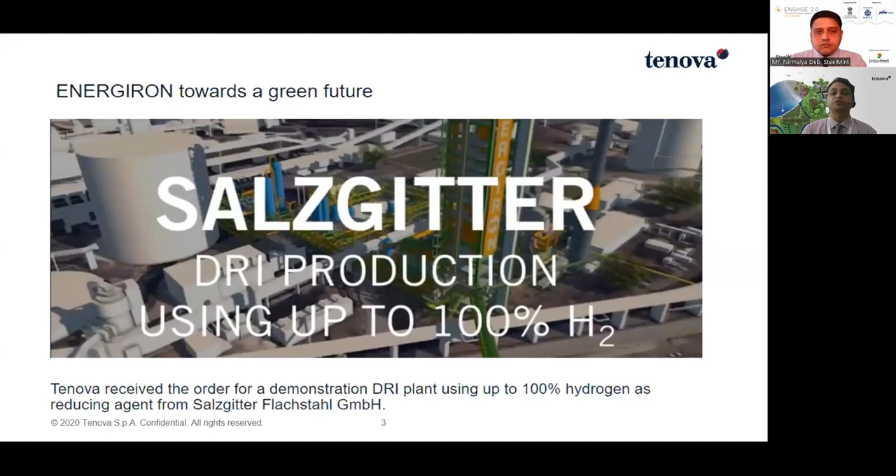Now, before China, we have already implemented such projects in Salzgitter. Salzgitter is in Germany, where we are already doing a project for them using 100% hydrogen. That is basically part of Salzgitter low CO2 steel making, in Germany. I'm going to explain more in the subsequent slides.

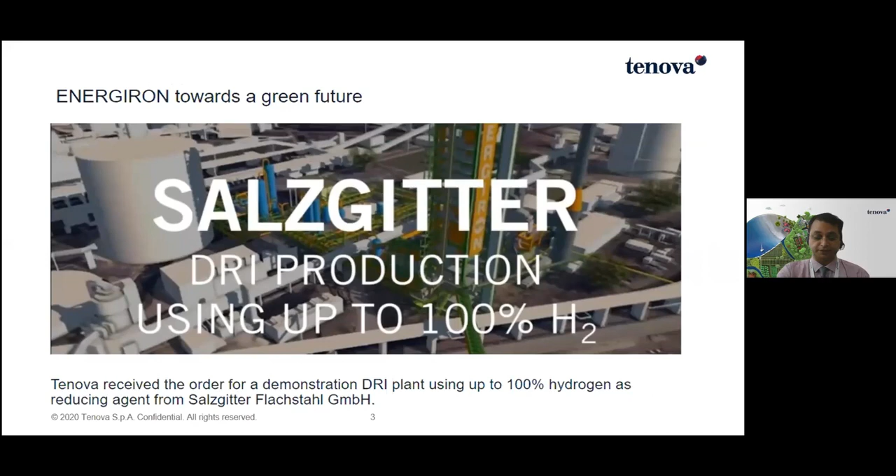Then HYBRIT. I think you might be hearing about HYBRIT in the recent news. This is in Sweden, done by SSAB. This is fossil-free steel, the world's first fossil-free steel making plant. And TENOVA, we are proud to be a partner of this mission. Now the plant is in operation in Sweden.

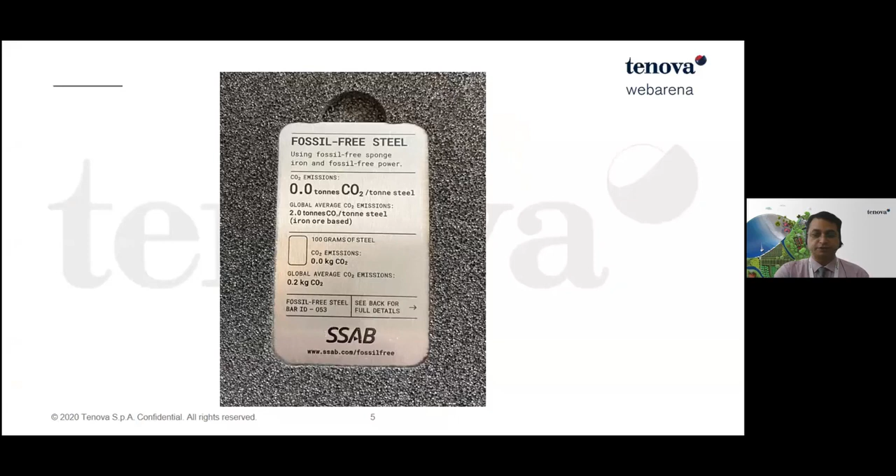You can see the fossil-free steel in actual. It is not in concept, not on paper, but in actual, it has been produced. SSAB fossil-free steel, where we have supplied our DRI plant.

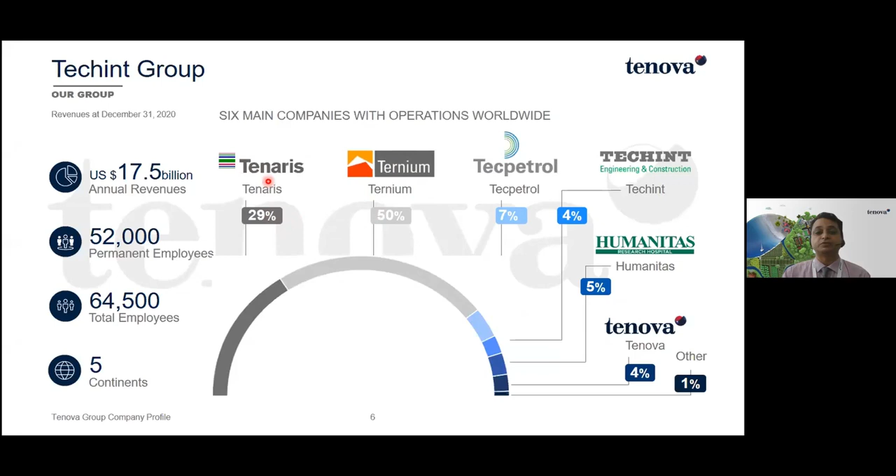So what we mean to say is that since we are part of the Techint group, which itself produces steel in a sustainable way, we know how sustainability plays a very important role for TENOVA individually.

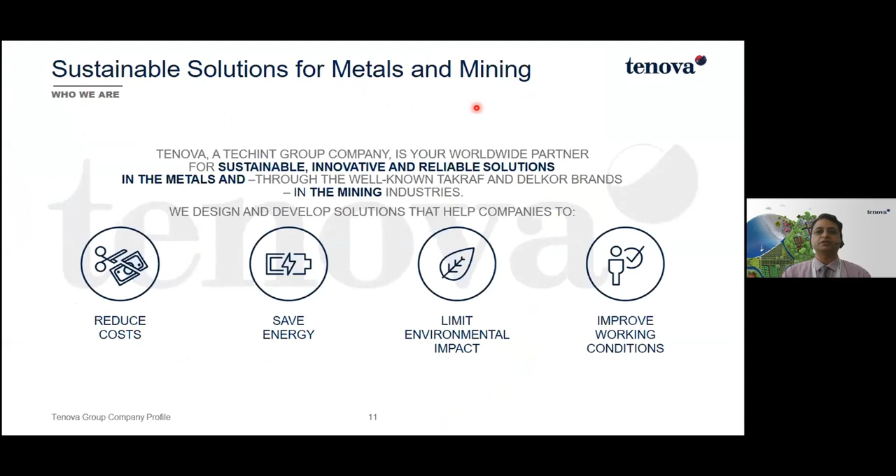So who is TENOVA? I'm taking one slide and then we'll jump to the main topic. We provide sustainable solutions for metals as well as mining. We focus on sustainability. And considering sustainability, we have come up with a new word, where you will find TENOVA appearing in that sustainability approach. So this is our mantra; that is why we developed a new word.

We have a worldwide presence, not only in India. Of course, in India in all the major cities, Mumbai, Chennai, Calcutta, Bengaluru, and in China also we are focused. So in this presentation, I'm going to focus on China and India because the topic is like that.

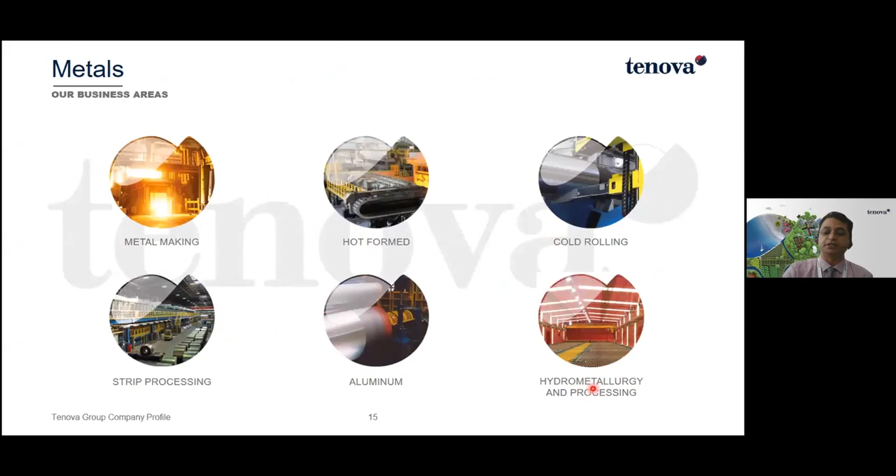So the main focus here will be our HYL technology, which is owned by us, and we will be discussing DRI making. As I told you, I belong to the metal division and upstream division. So we are into metal making, hot forming, cold rolling mill, strip processing, aluminum, and we are into hydro and pyrometallurgy also. Now, coming again to the topic, that is DRI.

Some basic concepts of DRI making I'm just going to touch upon, because in India there are a lot of coal-based DRI, there is the blast furnace route, and there are other routes also. So I'm just going to touch upon very basic chemistry, what we learned in elementary school: reduction with coal. Reduction means reduction of iron oxide. So this is a typical example of a blast furnace, which relies mostly on coal.

That is why you might be hearing that most countries are eliminating the blast furnace route and going ahead with either the scrap route or the DRI route. Why? The main reason is to reduce the footprint. You see, carbon is converted into carbon monoxide, and this carbon monoxide acts as a reducing agent, reducing the iron oxide from Fe2O3 or Fe3O4 to Fe and CO2. So at the end of the day, apart from iron, we are also generating CO2, 100% CO2, because we are using carbon monoxide as a reducing agent.

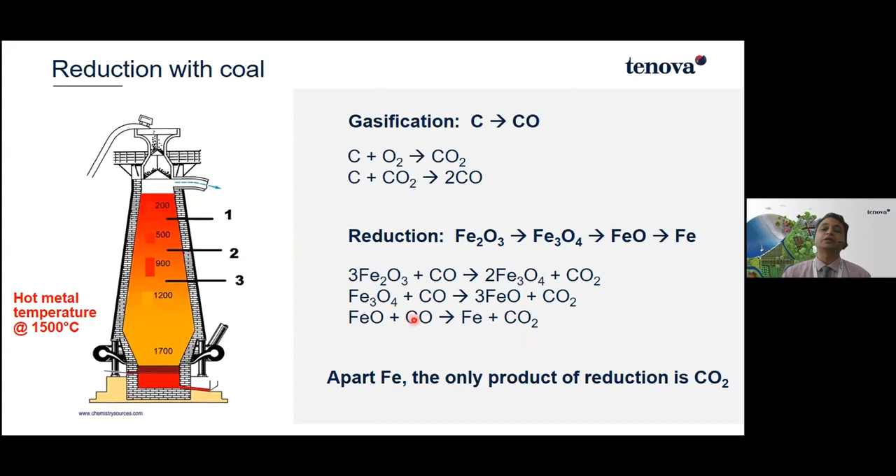Unlike that, in a typical DRI plant using natural gas, methane is broken down into carbon monoxide and hydrogen. Here hydrogen also comes into the picture for reduction; both carbon monoxide and hydrogen. In such a DRI plant, we put in the iron ore and get the DRI. Of course, there is no coal. They use the methane from natural gas to make these two reducing gases. And at the end of the day, apart from iron, after the reduction you find carbon dioxide and water.

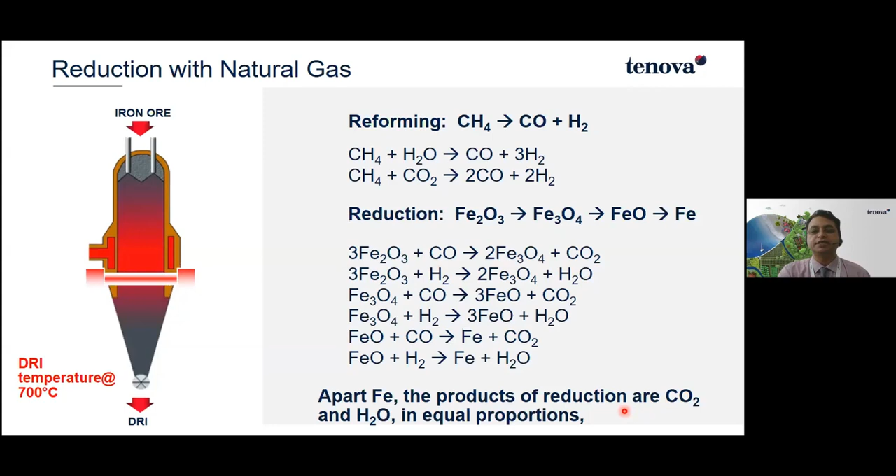So we can say there is a 50% reduction in CO2 as compared to the blast furnace. But our aim is not to stop at 50% carbon reduction. We should go for zero emission, and that is the main concept we are discussing in this forum. Now here hydrogen comes into the picture. I'm talking of green hydrogen, which can be obtained from electrolysis of water, and you can see we can produce oxygen as well as hydrogen.

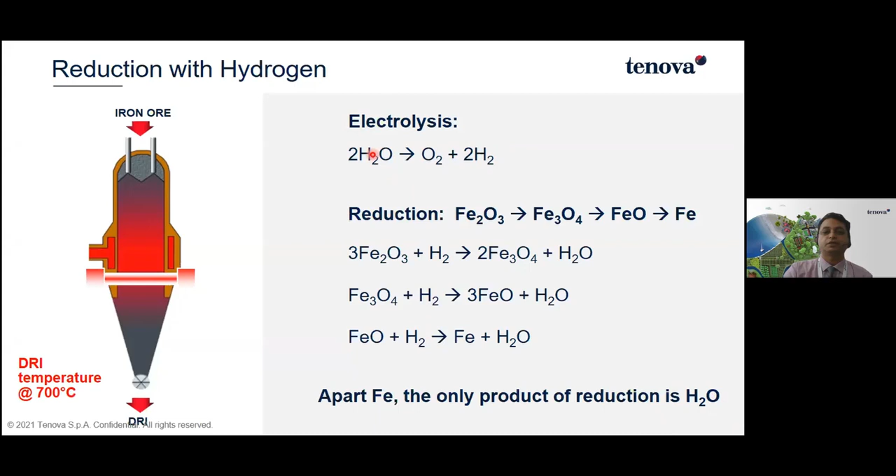And this hydrogen is used for the reduction of the iron oxide, and finally what we are getting is only water. So this should be our mission, the mission for zero carbon, which we can achieve with hydrogen if we produce it through electrolysis. So this is our DRI plant.

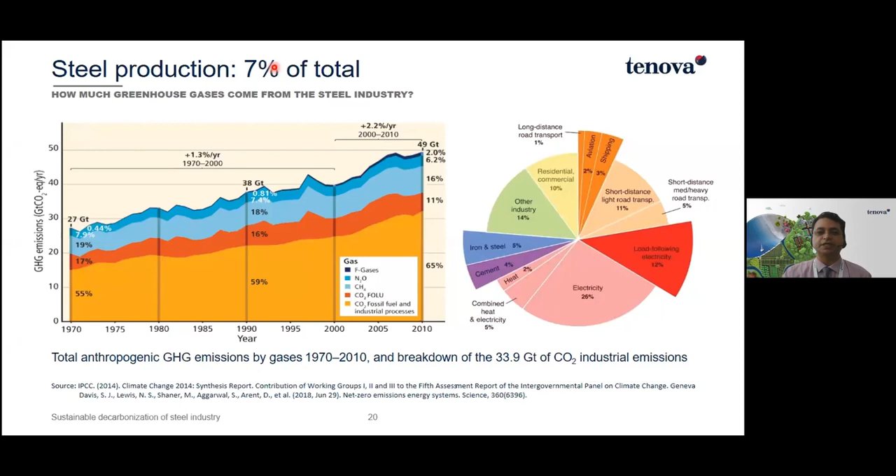Now, why are we talking about steel plants? Because it is a known fact that steel plants account for 7% of total greenhouse gas emissions. 7% is definitely not small, so we should focus on this. That is the main concept here.

Then there is DRI, which is based on natural gas or syngas or whatever gases are available. This is the DRI, so we are furthermore reducing CO2 by 50% at this stage. Rather than coke, it is substituted by natural gas or any other reducing gas which will reduce the iron oxide. Then finally, coming down, it is hydrogen.

Here, the aim is direct carbon avoidance. Rather than capturing and utilizing, why not focus on zero carbon effect? That is, avoid the carbon from the source itself. And that is how hydrogen comes into the picture. And by hydrogen, we are referring to green hydrogen.

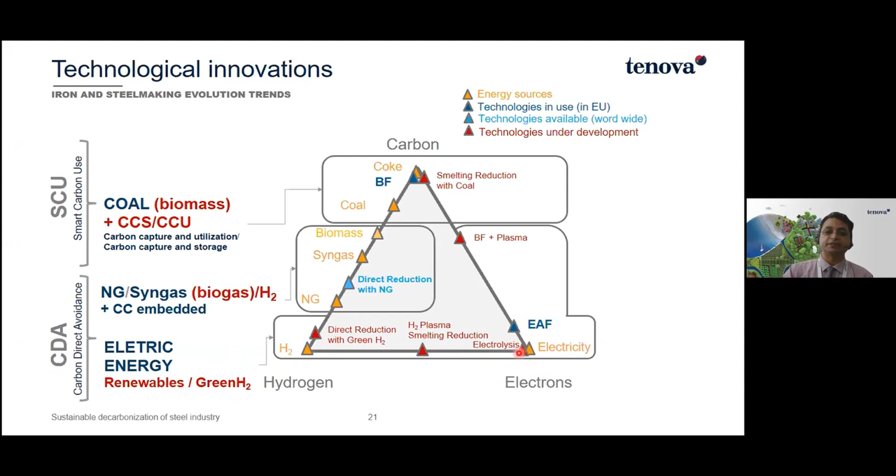What is meant by green hydrogen? It is hydrogen generated from renewable energy used to generate electricity, and that electricity goes into water to generate hydrogen. So that is the concept we are moving ahead with. Of course, there is also the electric arc furnace which uses electricity, and that electricity can also be generated from electrolysis. That is another topic which we can discuss.

In our DRI model, in the next slide I'll show you whether it is natural gas or hydrogen, it hardly makes any difference, because these two gases act as a reducing agent, as I have shown you in the previous chemical equations. The iron gets reduced, and that can be melted for steel making. So if hydrogen is available, we can substitute the natural gas.

And as for hydrogen, how it is getting generated, the main thrust should be renewable energy. That is more important, whether it is windmill or solar. So we generate the electricity, and in the electrolyzer, convert water into oxygen and hydrogen, and make green steel.

So the main theme here is that we should be ready with the flexibility of having whatever reducing gases are available, and our adaptability and preparedness for the future. That is more important, and China is already on this path.

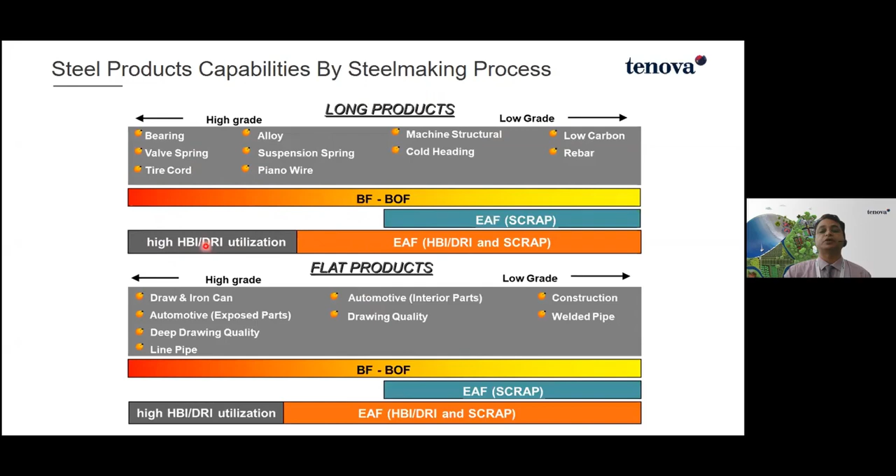Whether it's for long product or flat product, if one is installing DRI, it can cater to both long and flat product for low and high grade. So it can be a substitution to BF-BOF if you are opting for DRI, being a virgin source.

So this was a brief about the chemical scenario, economic scenario, market scenario, and how we can move ahead for DRI making based on hydrogen. Here you can see this is our HYL DRI technology, jointly developed by TENOVA and Danieli, and this is what we are going to brief you on in the next slide.

Here you may observe there is selective removal of CO2, because if you are using natural gas, definitely there will be CO2. As I mentioned, 50% will be CO2 and 50% water. So that 50% CO2 also we are not releasing into the atmosphere. Here the carbon capture unit and carbon capture storage, smart carbon storage units, come into the picture.

In our system, this is our DRI plant. I'll just explain. We put in the iron ore and finally we get either cold DRI, HBI, or hot DRI into the adjacent electric arc furnace. And nowadays the trend is to make pig iron.

This is a substitute to blast furnace, an alternate route of making hot metal. You put the DRI, and the DRI we get in our furnaces, in our DR module, in the HYL module, it is high carbon DRI. High carbon DRI means the carbon content goes from 1.5% up to 5%.

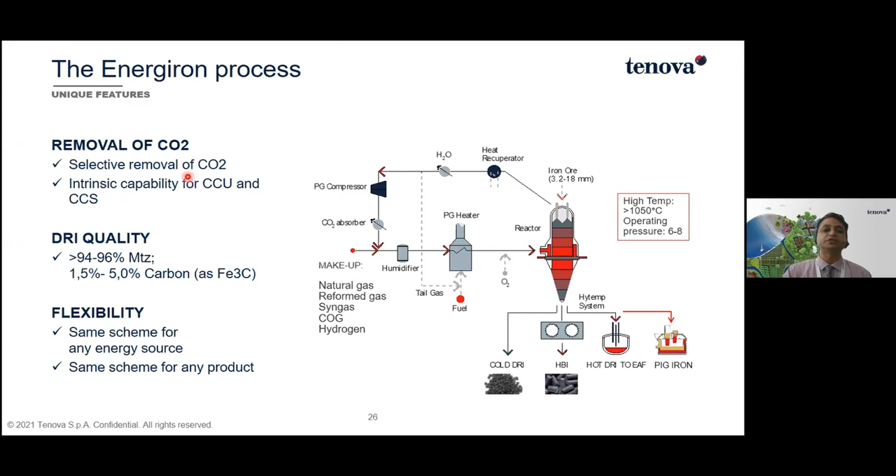Here, the CO2 removal system, as I was mentioning, inherently removes the CO2. This is very important, because if you are using hydrogen, there won't be any CO2 generation. But in case of methane, or coke oven gas, or other gases, there will be some CO2 generation. So what we do, through a selective removal system, is remove 60% of the CO2 that's generated in the system, and this CO2 gives added value as a byproduct.

It can be used for food and beverage industries, production of dry ice, or pumped into oil wells for boosting oil production, like the people at Emirates Steel are doing. Companies like Ternium and Tenaris sell it to Linde and other companies for food and beverage industries.

In Indonesia, they use it for food industries. At JSW Salav in India, the CO2 is sold to Air Liquide for making dry ice. Emirates Steel, as I mentioned, use it for enhanced oil recovery. So whatever CO2 is generated, we are not emitting it to the atmosphere—we are capturing it and utilizing it properly.

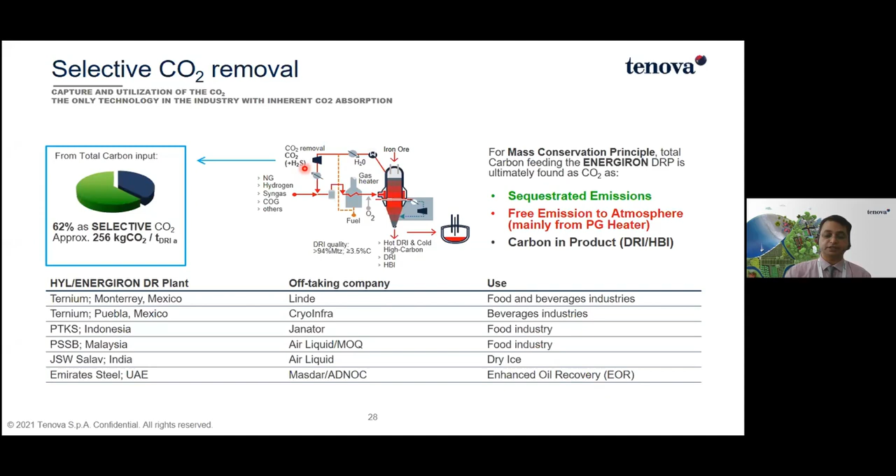Now, pig iron production via DRI plant, that's what I was mentioning before. The more important point here is that you can find the DRI plant clubbed with an open slag bath furnace. This is a reducing furnace beneath it.

What is the advantage of this? One feature is that we produce high carbon DRI on the top—in our system, we produce high carbon DRI of more than 4%. And there is a reducing arc furnace.

Basically it's a submerged arc furnace. It appears to look like a submerged arc furnace, but we work in a brush arc mode. Basically it does the reduction and helps melt the DRI from 600 degrees to 1400 degrees centigrade, whatever the blast furnace hot metal temperature is, and it can be poured directly into the torpedo ladle.

The other advantage is that we can maintain the BOF facility in the downstream—we just have to replace the blast furnace, no need to occupy more space. Everything happens in a vertical chamber.

A very important factor here is that we are not depending on DR grade pellets. BF grade pellets can be very easily utilized, so we are not requesting any DR grade pellet—only the BF grade, low cost pellet can be used. Why? Because the gangue that comes in can be removed in our open slag bath furnace, OSBF. And the slag we get can also be used, just like in a blast furnace, in the concrete industries.

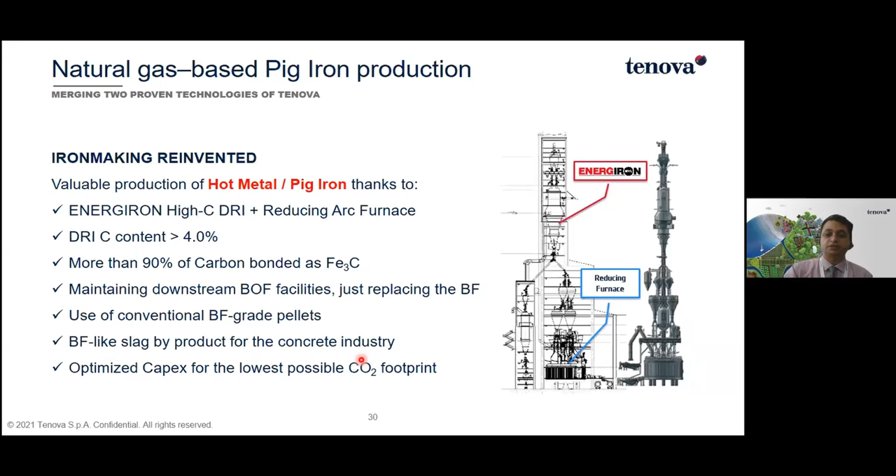Coming more into this concept, pig iron production via DRI.

Here you can see the real plant. The DRI is on the top and OSBF, open slag bath furnace, is in the bottom. There is provision for removing the slag, just like in a blast furnace, and we can also tap the hot metal into the torpedo ladle, which can be utilized in the existing downstream facility.

So there are various advantages of this type of furnace. You don't need such a big transformer as compared to the electric arc furnace, DRI and electric arc furnace route, wherein you need a high transformer, flicker, then SVC. Those things are not required. It looks like a submerged arc furnace having the Soderberg paste electrode. The refractory life also lasts up to 5 to 10 years. Unlike electric arc furnaces, the building is very small. There is no building as such.

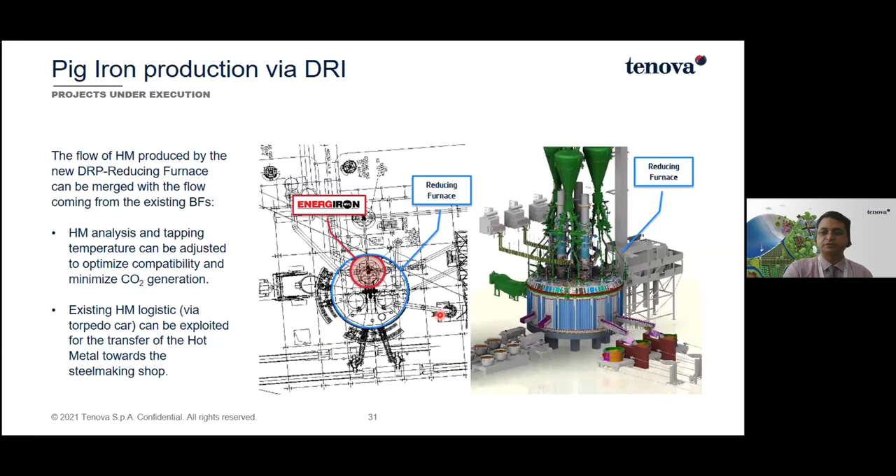It is installed just beneath the DRI plant. So yeah, this is one of the concepts already being implemented at various places.

Hydrogen-based DRI. Now we are coming back to the topic: carbon capture unit utilization, carbon capture utilization, or carbon capture storage, whatever it may be. Our aim should be carbon direct avoidance. Directly we have to avoid the carbon.

So you can see this is the DRI plant. As a reducing agent, what we are using is hydrogen, pure hydrogen. How is hydrogen generated? From electrolysis. And how do we get the electrical energy for electrolysis? That is from renewable energy. We are not using any thermal energy.

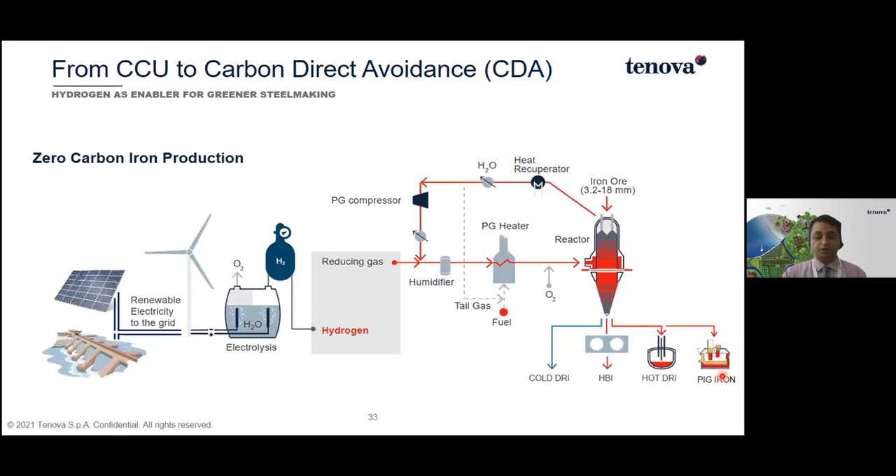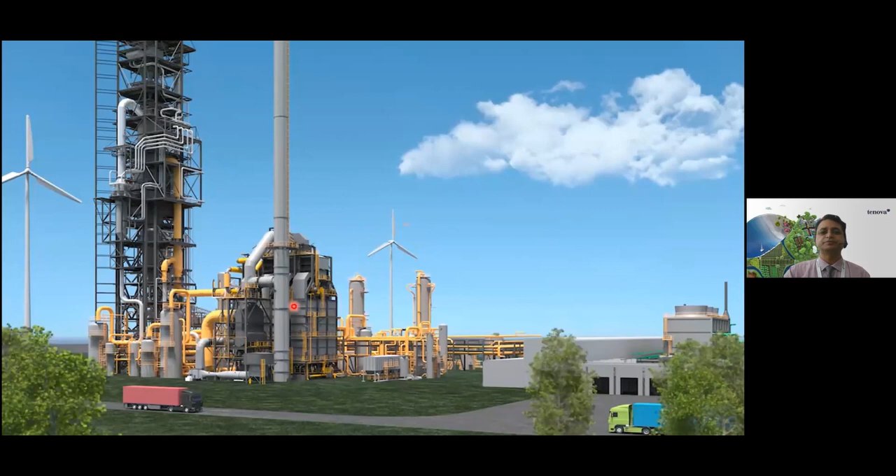This is the scheme we have explained to you, that we can make cold DRI, HBI, hot DRI, or pig iron. This should be our vision: a DRI plant clubbed with solar panels and windmills, generating electricity that can be used. So this is a total iron making facility. This is a process gas heater, and this is basically our DRI tower.

We did this in the 90s, some 30 years ago, with 90% hydrogen we trialed and tested it, and it was well proven, not an issue. That is why what we are thinking of now with hydrogen, we already did long ago as a pilot test, and it was quite successful. That is why we are available in the market for this type of hydrogen-based DRI.

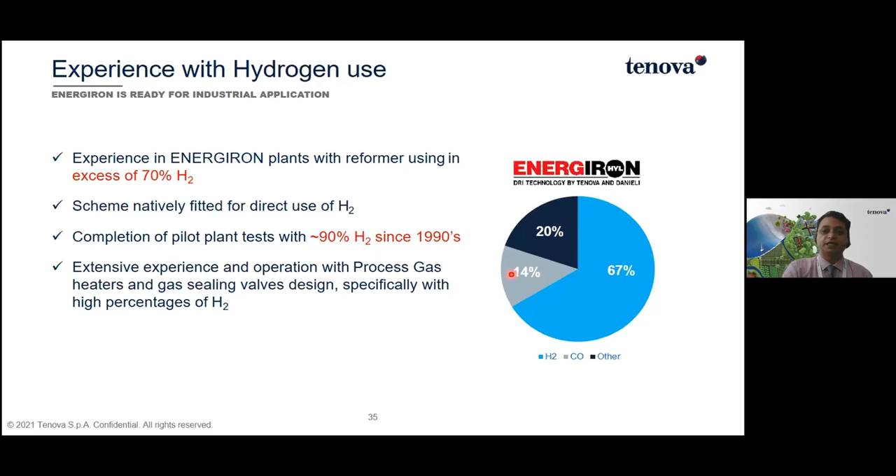I'll explain the advantage of hydrogen as compared to carbon monoxide. Of course, carbon monoxide generates CO2, but hydrogen doesn't generate any CO2.

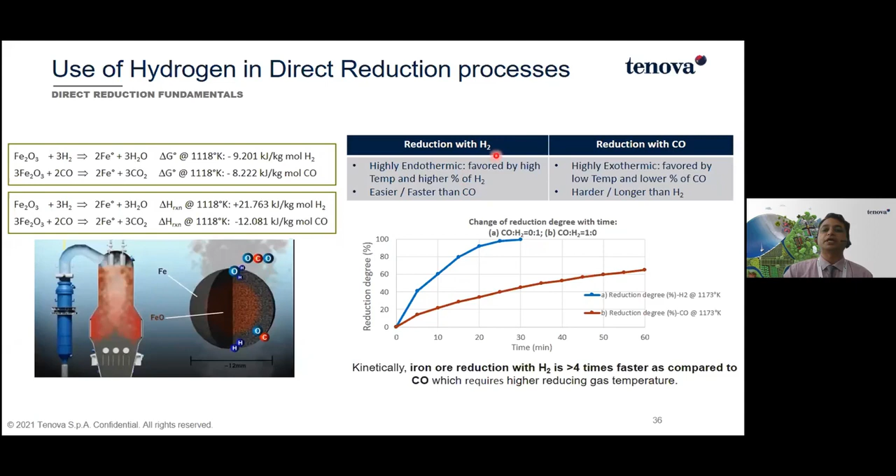From an energy balance point of view, there are two reducing agents for these gases: either hydrogen or carbon monoxide. With hydrogen, apart from not generating CO2, the other advantage is the reaction is very fast. If hydrogen reduces iron oxide, it is 4 times faster compared to carbon monoxide. That is why we are able to utilize more hydrogen as a reducing agent, because our purpose is to reduce the iron oxide, and that is what we are doing.

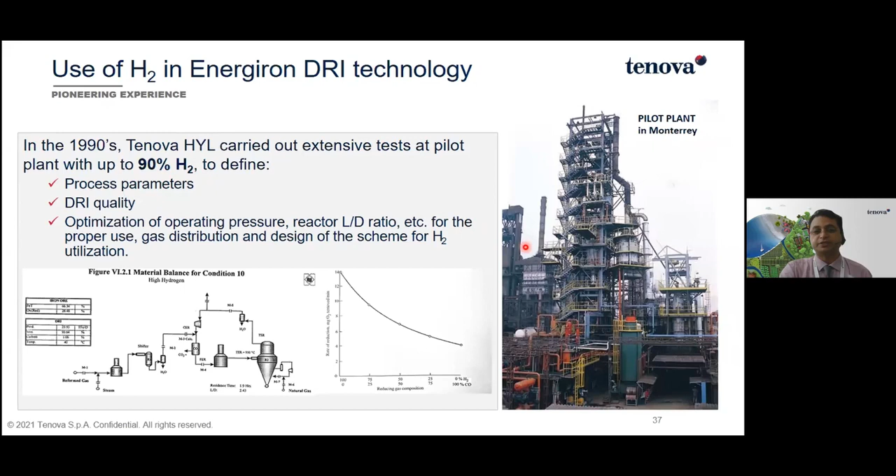It is more efficient because we are working at high pressure as compared to other technologies available in the market for gas-based DRI. In our system, the reactor itself is pressurized, 8 bar, as compared to other technologies in the market at 1.5 bar. With high pressure you also get high temperature. The equipment required is much less, and more importantly, we are able to use very little electrical energy compared to systems available in the market that work at low pressure.

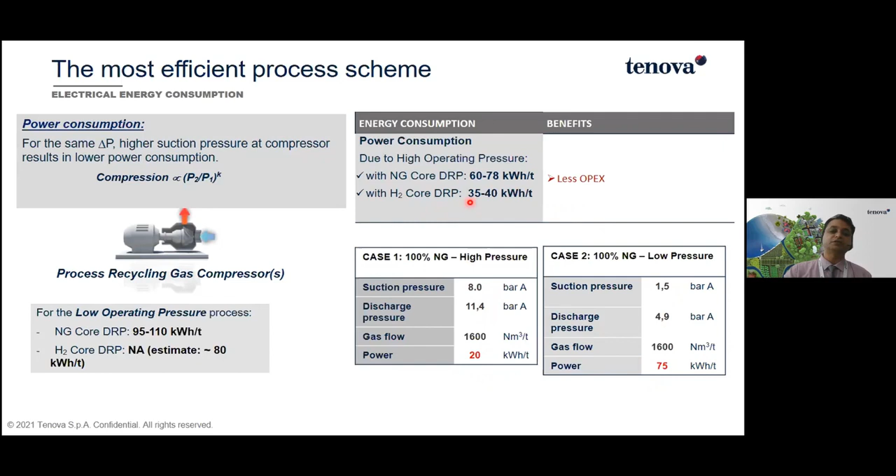So that is why OPEX is also very, very less as compared to. Even furthermore, if we are using hydrogen in the same proportion, it is much better as compared to the natural gas in energy consumption. So in this slide, this is what we are showing: the energy benefit in terms of switching from natural gas to hydrogen.

Because in China or wherever we are installing this plant, those plants are equipped to use either 100% natural gas, any proportion, 35%, 55%, and gradually up to 100% hydrogen, and vice versa, hydrogen to natural gas and natural gas to hydrogen, or any combination of gases. But if you are using more hydrogen, then energy consumption will be very less. So this is what we are trying to show here.

And coming to the CO2 emission, definitely there is a benefit if we switch from natural gas to hydrogen, and if that hydrogen is green hydrogen, then it is called zero carbon emission.

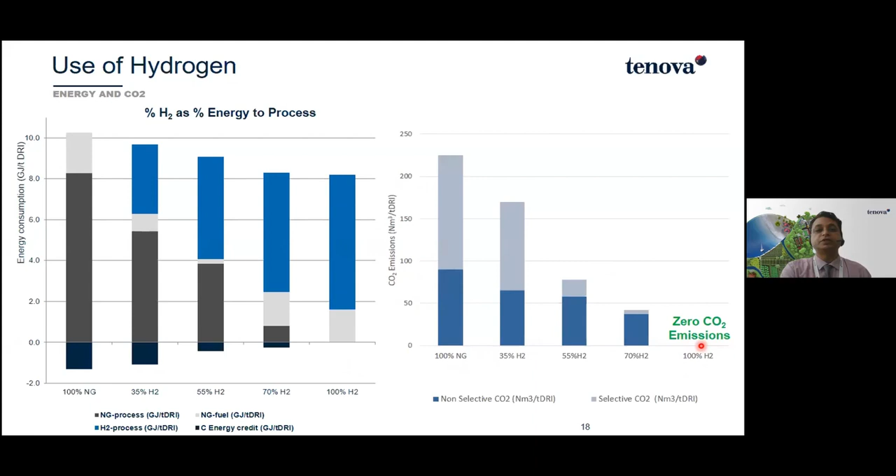Yes, for making 1 ton of DRI, we need approximately, for the reduction purpose, around 50 to 55 kg of hydrogen. That is equivalent to about 600 Nm³ of hydrogen. And another question may come up: for generating 1 kg of hydrogen, how much electrical energy is needed at the electrolyzer at the moment? That comes out to roughly 40 kilowatt hours. So you can see it is not less. We need huge electrical energy for hydrogen generation.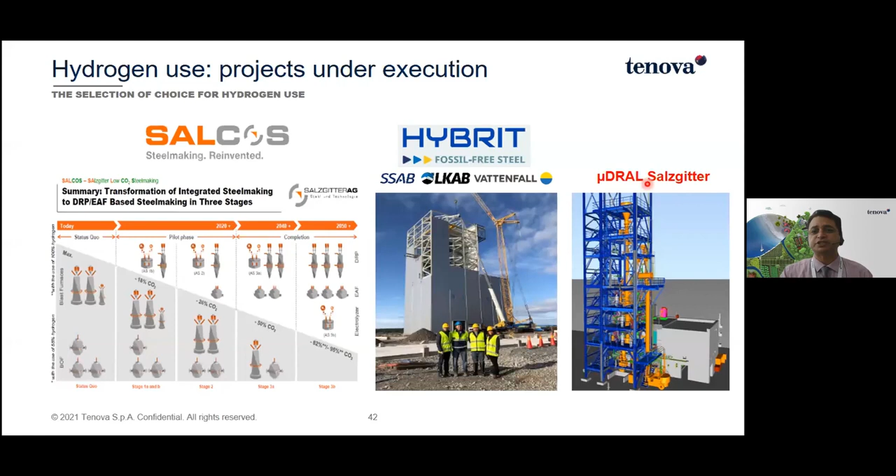This is µDRAL. Again, this plant is based on 100% hydrogen. This is also in execution phase and will be completed within the mid of this year. I think this summer we will be able to get the result out of it. This is in Salzgitter, the same. This is a demonstration plant for SALCOS.

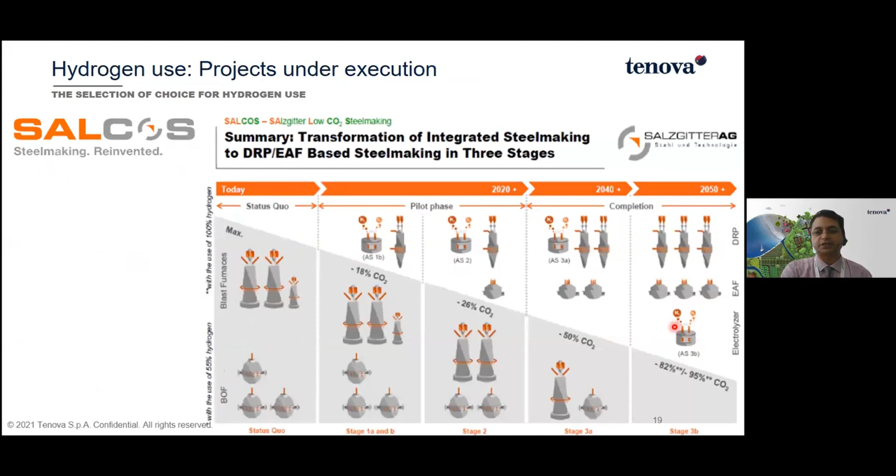Yeah, this SALCOS which I was mentioning, this is the same elaboration I did, that in a gradual way they are switching from blast furnace BOF to DRI EAF. Of course, you will find the electrolyzer here. Once it gets implemented, they will switch over to 100% hydrogen. So the SALCOS approach, I'm just mentioning further slides on this. Conventional coal-based BF route. Why am I referring to SALCOS?

Because the same philosophy is now being adopted by China, these two plants which I was mentioning. Conventional coal-based BF route, because in China also, right now, these two steel makers which I have shown are making steel mainly through the BF route, and it accounts for 1.6 ton CO2 generated per ton of liquid steel. Of course, for the Indian case, it is, I think, more. It is something around 2.2 ton.

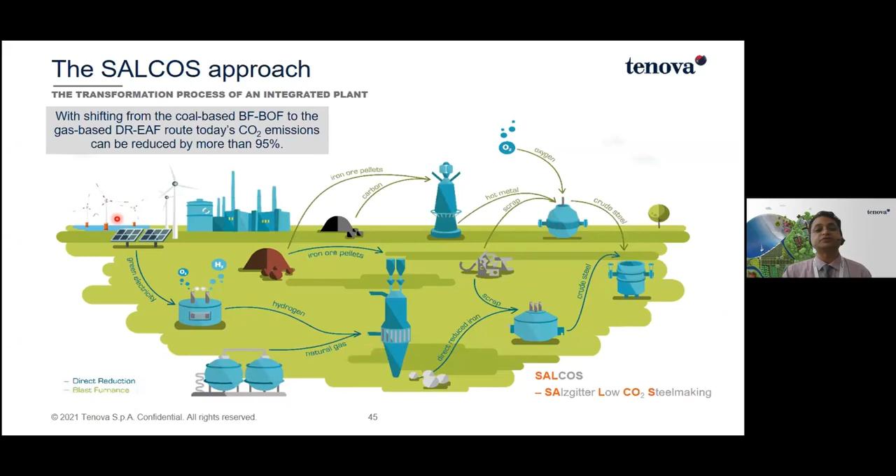The shifting and transformation process will be from BF to the gas-based DRI route, to reduce the emission by more than 95%. How? You see the dark blue line, that is direct reduction. You install the DRI plant, install the electric arc furnace, and make the steel out of it. Downstream facilities will remain the same. And this can utilize natural gas, as I mentioned, or it can also use hydrogen in any proportion. The hydrogen is generated from green electricity. So this is the approach of SALCOS.

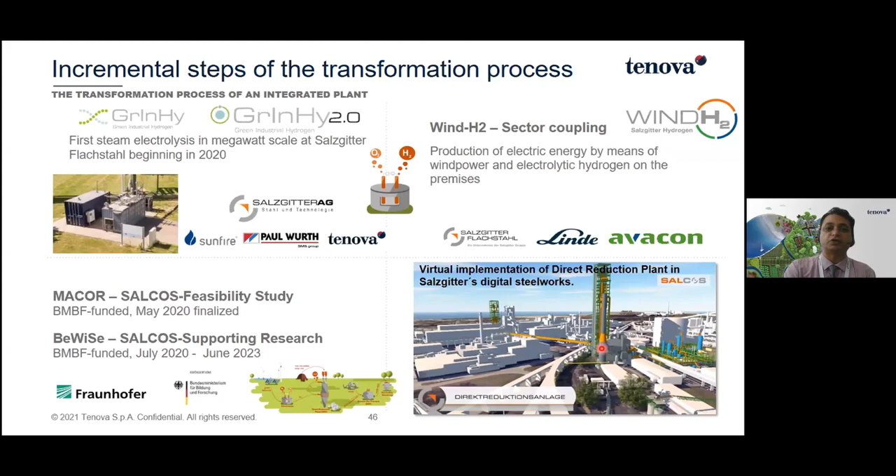So in SALCOS, there are a lot of agencies involved. Our part is to make the DRI plant. And there are other agencies involved for the electrolyzer and wind and solar energy, how to convert it into electricity, and that electricity into the electrolyzer. So there are various agencies involved in the SALCOS project. Yeah, I was mentioning the same SALCOS.

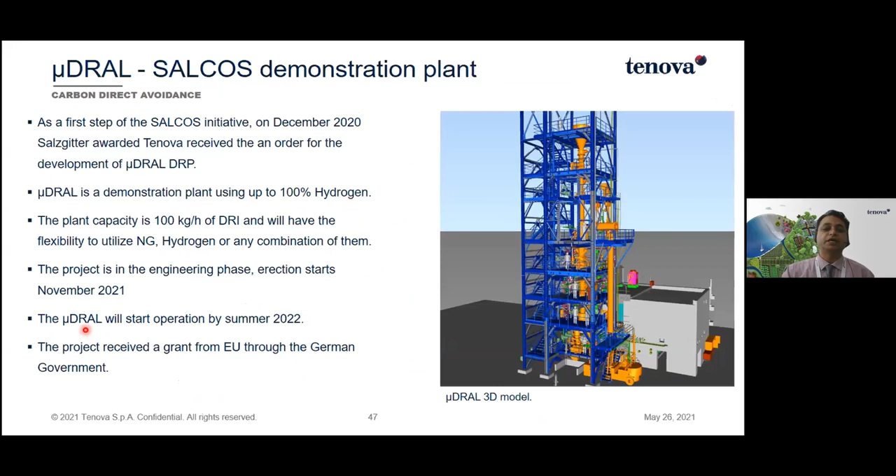They are also doing a project in parallel for the µDRAL, the demonstration plant which I was mentioning, that will use 100% hydrogen, already in execution phase, and we hope this will start in the summer of this year itself. So in a nutshell, back to SALCOS, here there is a DRI plant with the best available technology, equipped to run with natural gas and/or green hydrogen, and so this is basically a part of carbon direct avoidance.

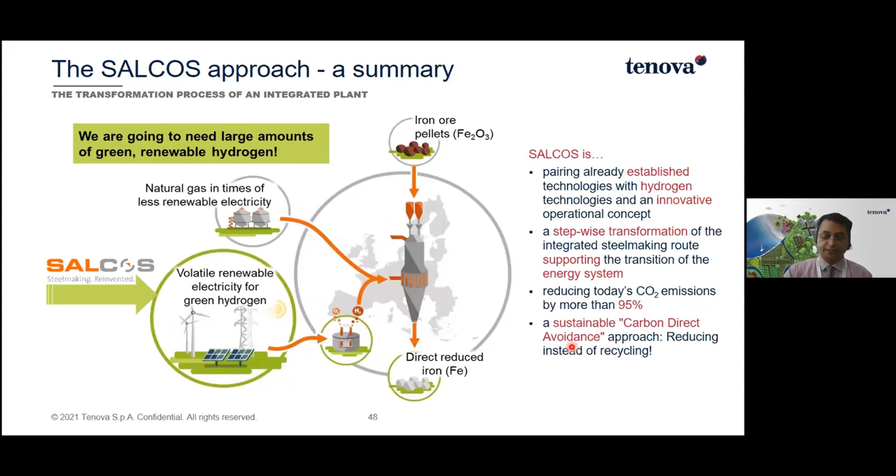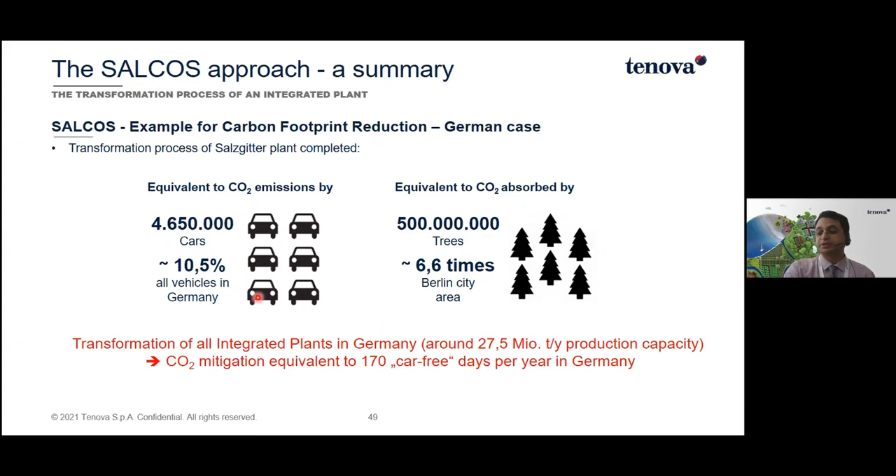Yeah, this is the HYBRIT project. As I mentioned, you might have seen it in the recent news. The aim is to replace coking coal with hydrogen, and the main effort is to reduce CO2 and decarbonize the steel industry. This is the project in Sweden, already commissioned, already in production. You might have seen the small sample which I showed you in the previous slide. Inside there is a DRI plant, and we are supplying our DRI plant. So there is no carbon footprint. The plant is now in operation.

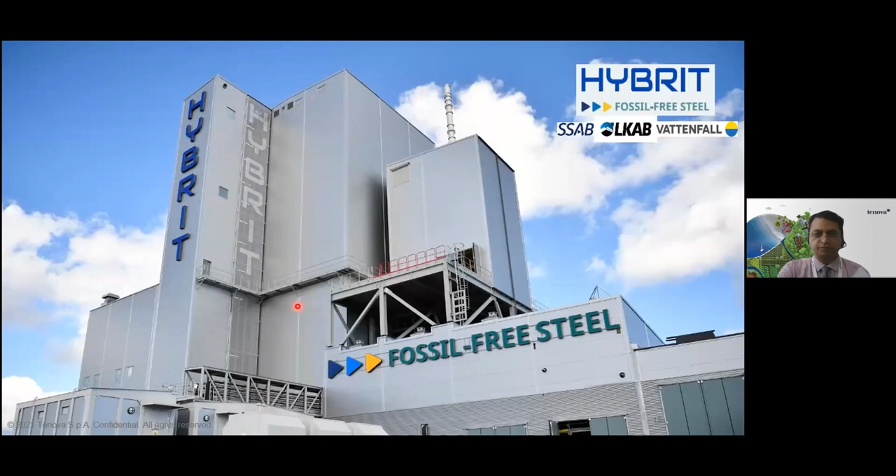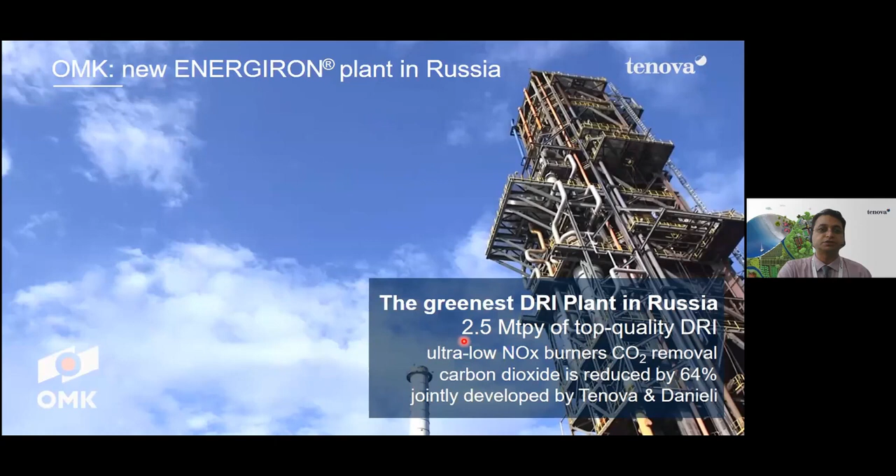So this is one of the plants in Russia. This is the greenest DRI plant in Russia, now in implementation. This is a big plant, 2.5 million ton. And it is already fitted with a CO2 removal system, which will reduce the carbon footprint by 64%. It is already in execution phase. Of course, from Russia, I think we should quickly jump back to China, because Russia is already in the news. So anyway, coming back to China.

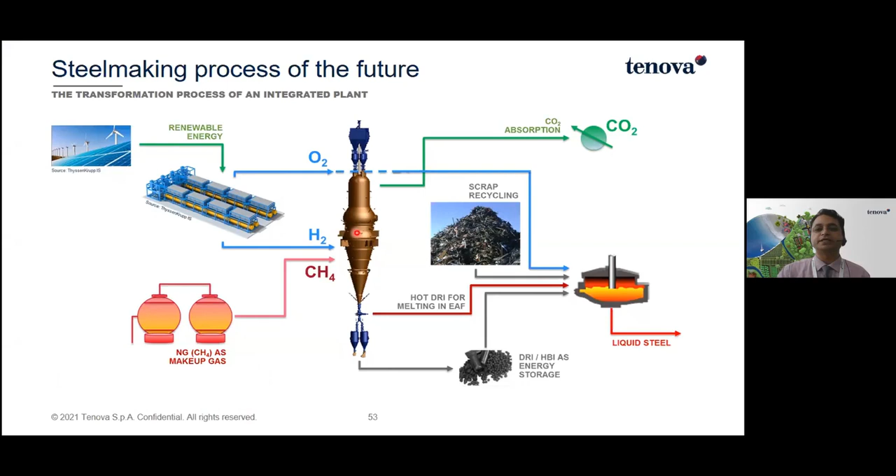Coming back to the hot metal, just to give you the basic idea of how we are talking about replacing the blast furnace with the DRI. This is a DRI.

We are making the high carbon DRI. That is, if you are using natural gas, 4 to 5% of carbon. Then this high carbon DRI at 650 degrees will be melted in our OSBF. Either you can put it in an electric arc furnace, or you can use it in the OSBF.

The advantage of OSBF is that it will remove the slag, all the silica and gangue, whatever is coming in the iron ore, that is the BF grade pellet or even the low grade pellet, we can use it. So we are not bothered about how much gangue is there, because we are doing the adjustment here. We are also doing the adjustment of the carbon here. Of course, when it is 4 to 5% carbon, then we are very happy.

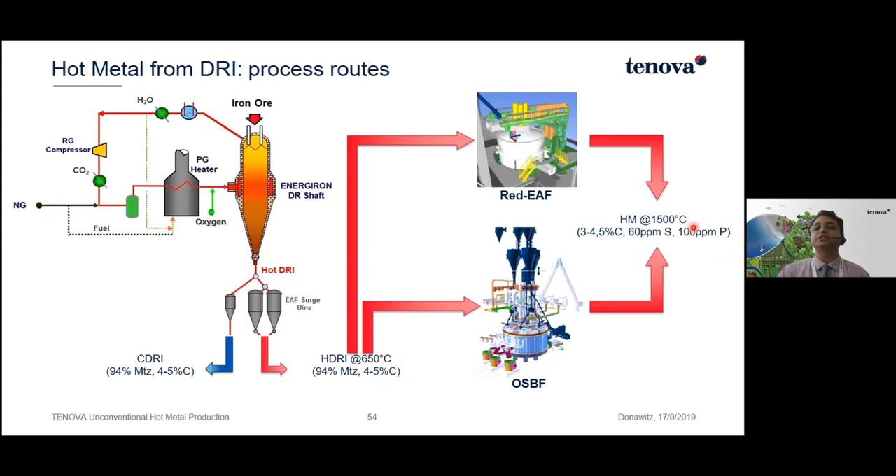But if we are replacing this natural gas with hydrogen, then there won't be any carbon in the DRI. We can add the carbon to the DRI in OSBF to maintain the same consistency of the hot metal which we are getting. And downstream you can use the BOF or LD shop, which is already prevailing.

For example, just to give you more idea on this, reducing the carbon footprint. Normally pellets, of course, are required. The existing practice nowadays is that whatever pellets are there, we put in the blast furnace, and then it goes into the BOF. But with DRI and OSBF, use the same pellet, the BF grade pellet. We are not asking for the DR grade pellet, the costly pellet.

Use it in the DRI plant, melt it in our OSBF, make the same chemistry of 4.5% plus minus, whatever you are getting from the hot metal, pour it in the same torpedo ladle, and use the same downstream facility for making the steel. In this process, you are reducing 50% CO2 emission if we are switching over from coal to, here I am referring to the example of natural gas as a reducing gas.

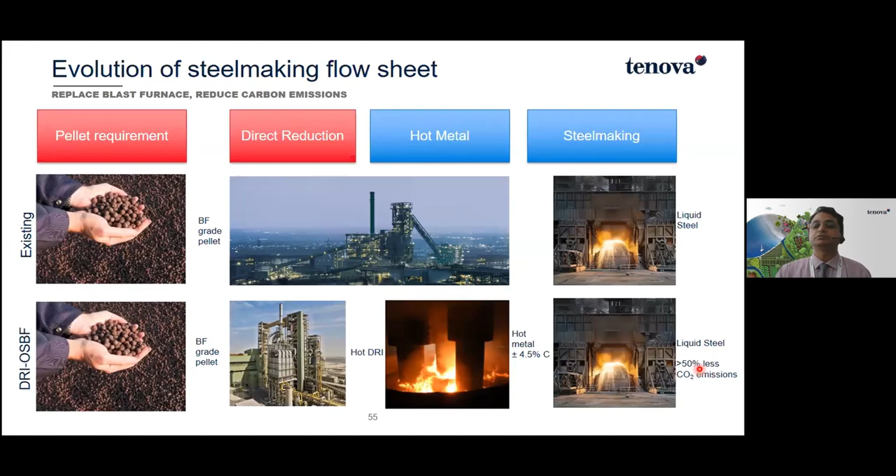But if you go with hydrogen, of course, we have to see the economics of the hydrogen, at what rate hydrogen is available. And then there will be 95% reduction in the CO2 emission.

So normally scrap, again, I'm coming back to the scrap. If you are having scrap, as you know, we have the technology of melting the scrap in our electric arc furnace called Consteel. So this is a way to reach carbon neutrality. China has already been on this journey for the last 20-25 years. In China there is either hot metal, meaning blast furnace, or scrap, so they play between the two. There we have got more than 60 installations of such Consteel electric arc furnaces in China.

And now they are switching from the scrap route, they are moving to iron ore using hydrogen-based DRI. Already two large steel players like HBIS and Baosteel are on the job. You can install the OSBF, or you can put a typical electric arc furnace, and from OSBF you can make the hot metal and it goes into the BOF, or else you can install an electric arc furnace.

There is one more furnace concept which we can discuss in a separate forum, that is called the flexi modular furnace. That is also quite commonly available; we have supplied it in China. They are using the flexi modular furnace. They have flexibility in terms of charge mix, whether it is DRI or hot metal or scrap, in whatever composition, in whatever proportion it is available, we are able to make steel out of it. So it can work in BOF mode as a converter, or it can also work in a typical electric arc furnace mode. So we call it the flexi modular furnace.

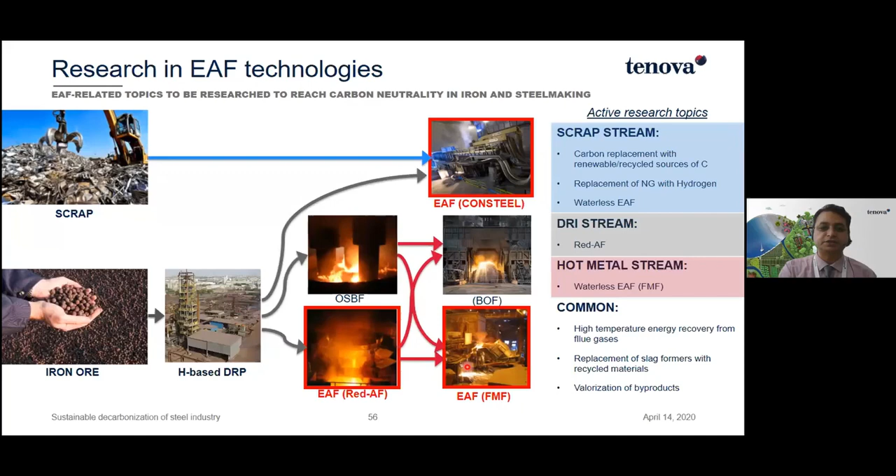There is yet another plant, Black Rock in Quebec, Canada. They have also installed the same plant, the DRI, presently with natural gas, and they are also ready to switch over to hydrogen to make high purity pig iron, the same DRI and OSBF, and make the pig iron out of it.

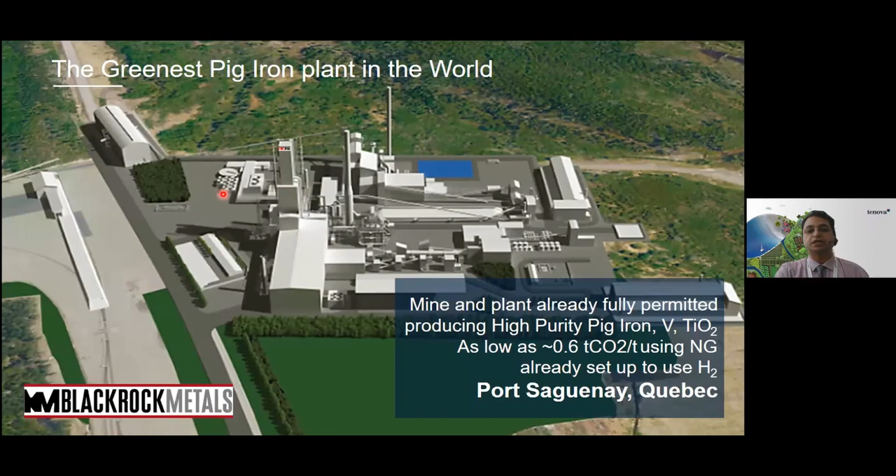So this project is already in the completion phase. We just have to check what the status is. And now coming back to HBIS again, I'm just showing HBIS and Baosteel. As I mentioned in my previous slide, Baosteel has given us the order for installing the DRI plant, and this is going to be a 1 million ton DRI plant for reducing carbon emissions.

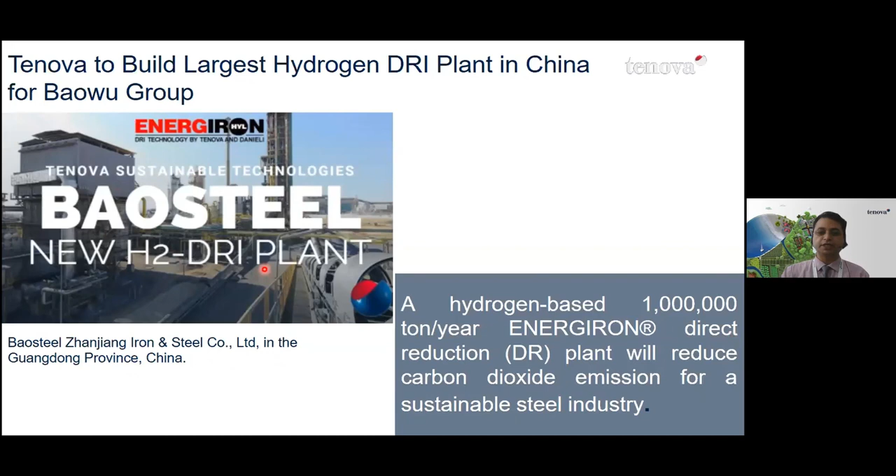And these are also fitted to use hydrogen, natural gas, coke oven gas, whatever gas is available, but it is designed for hydrogen. So thanks. This is my presentation in a nutshell.

I think I have completed in 45 minutes the time slot Mr. Nirmala has given me. And if there are any questions, you can ask. Thank you, sir. A very comprehensive presentation. I have one or two quick questions that I want to ask you.

First of all, it's very interesting that we are combining pig iron with DRI and dispensing with the blast furnace. But as we know, there was a recent study by BHP showing that the age of blast furnaces in China and India is much less than in Europe and other parts of the world. In China, the average age is about 12-13 years, while in India it's about 18-20 years. So huge investments have come for new blast furnace building in China.

So how does it fit with DRI, dispensing with blast furnaces and feeding the BOF directly with DRI? Now that so much investment has already gone into blast furnaces, how long could it take for China to gradually move over to DRI?